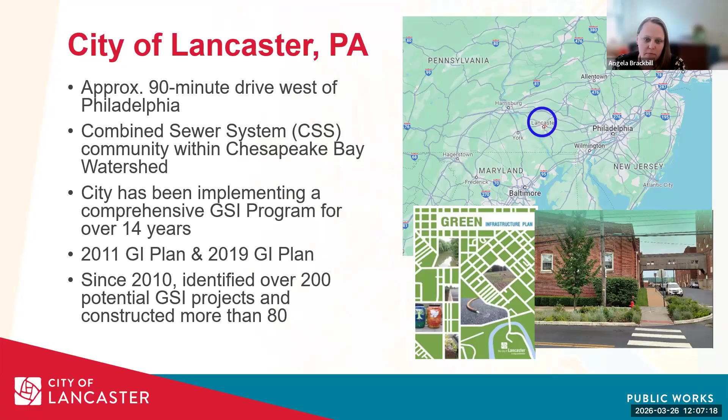Since its fruition, about 2010, we have identified over 200 potential green infrastructure projects in the city, both public and private, and constructed more than 80 of those projects on private and public property throughout the city. Just a little background on this project. So Longs Park is located in the northwest corner of the city of Lancaster, Pennsylvania. It is in those annexed MS4 areas of the city.

The entirety of the park is tributary to the Little Conestoga Creek. The Little Conestoga Creek is tributary to the Conestoga River, which is ultimately tributary to the Chesapeake Bay. This Little Conestoga Creek is listed as impaired for pathogens, but Longs Park itself is one of our most popular parks in the city. It's over 80 acres, and it is owned, operated and maintained by the City of Lancaster. This park hosts a ton of activities every year, especially in the warmer months, including art, music, and food festivals, and many other events.

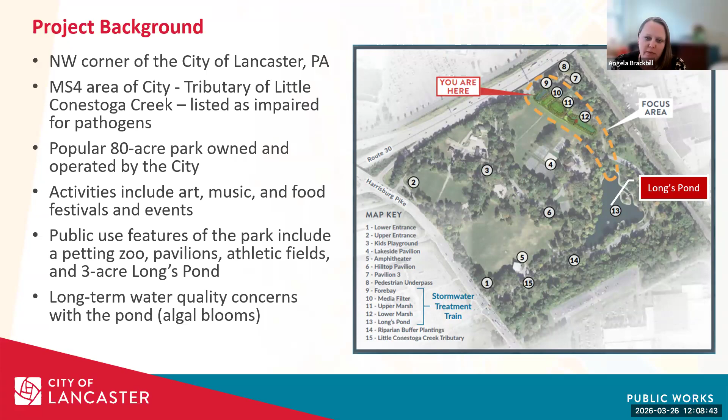Public use features of the park include a petting zoo, pavilions, many athletic fields, and kind of the crown jewel of the park is a 3-acre Longs Pond, which can be seen here on your screen. Longs Pond has long suffered long-term water quality issues. With the pond, it's more algae and algae blooms that we've had issues with. So part of the implementation of this project did deal with the pond here, and I'll get to that in just a second.

So as I mentioned, the main goal of this project was to improve that pond, improve the water quality, and reduce the algae in that pond by not only treating the nutrients, but also increasing the flushing to the pond itself. With that, and our MS4 permit, we were also required to meet or exceed regulatory requirements of the city's Chesapeake Bay Pollutant Reduction Plan. So this was a plan that we had to meet. We reference it as the CBPRP.

And that plan did require, in the Little Conestoga Creek watershed area, that we install means to achieve about a 10% reduction in total suspended solids in that watershed. Other goals of this project, being a municipality, was leveraging multiple funding sources such as grants, which I will dive into in a bit. And then, of course, designing with maintenance in mind. As I mentioned earlier, we own, operate, and maintain this park, so maintenance was a very big and key piece of this project.

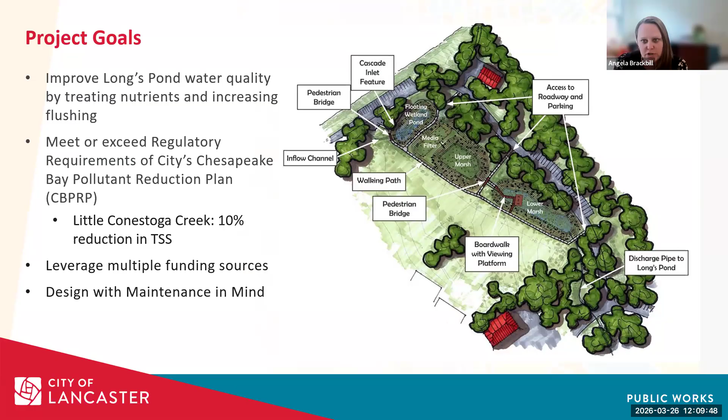Many considerations went into this project. First and foremost, being such a popular park, we had to make sure that it was a public amenity to the park and that it was complementary to Longs Park's aesthetic, its use, and also its users' experience. Other considerations was park space. It's a very popular park. It's very heavily used. So we had to be mindful of the footprint of this facility. We couldn't take up too much space in the park for this facility.

Long's Park is also known for its big, large canopy trees, large oaks in particular. So by installing this facility, we had to make sure that we were protecting those existing trees and that existing canopy versus installing stormwater and removing such.

As I mentioned earlier, part of the treatment of the system to the pond itself was increased water to the system. So we had to make sure that it performed during large storm events. Long's Park doesn't flood now, so by introducing additional flows to the pond, we didn't want to create a flooding situation that doesn't exist now. And then again, of course, design considerations back to that maintenance and cost.

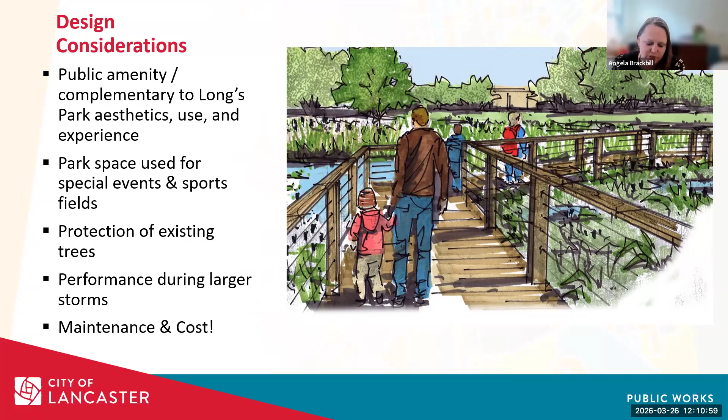So Long's Park wetlands are constructed wetlands and they're considered a treatment system or a natural treatment system, which is essentially an engineered ecosystem that uses natural, biological, physical, and chemical processes to improve water quality. In other words, solids are removed through settling, phosphorus is removed through biological uptake and settling, and then nitrate is removed through denitrification.

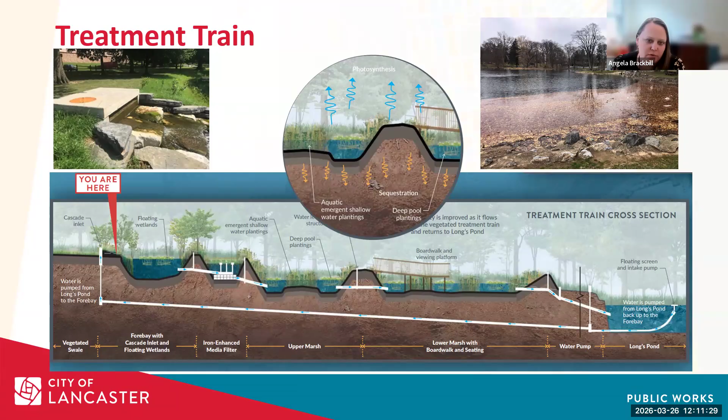I can use my laser here, see if I can figure this out. Hopefully you can see that. So just as a briefer for this project, you'll be able to see Long's Pond here on the right side of your screen. Essentially water is pumped from Long's Pond through conveyance to the system. The water enters the system through what we call an inflow or a cascade structure.

It then enters about a 0.1 acre forebay that includes floating wetland islands, an iron enhanced media filter, which is about 0.1 acres, an upper marsh, and then a lower marsh, which are both about 0.2 acres. And then that treated water is conveyed back down into Long's Pond. So it's really pumped up through the natural treatment system and treated, and then that clean water heads back down to the pond.

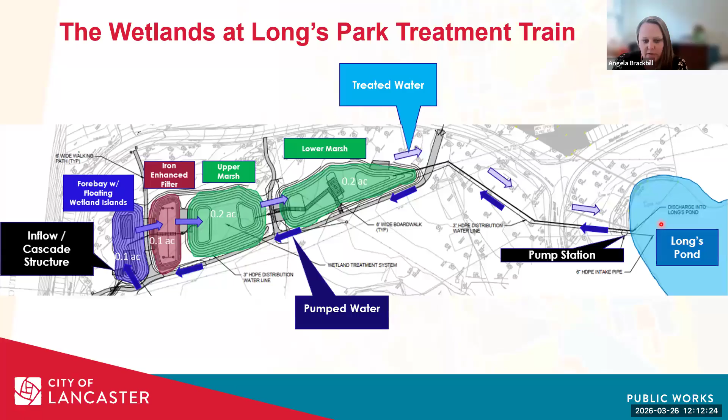So drainage areas were pretty key, obviously, with this design. It really does have two inflow sources, right? I alluded to a pump station previously. So stormwater runoff is received from Route 30, but then water is also pumped from Long's Pond.

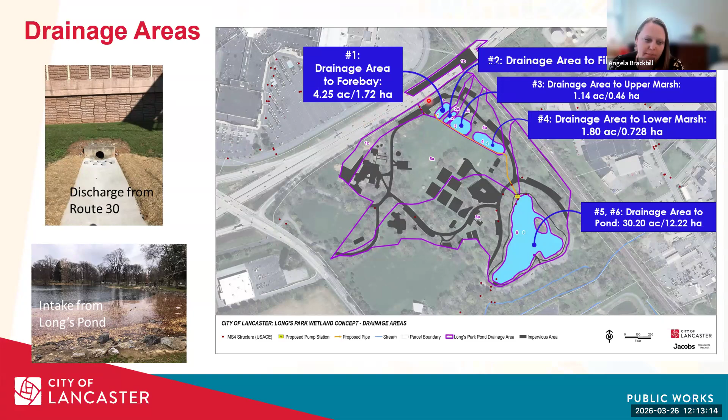So to dive into the pieces a little bit, the first system that the water enters is that 0.1 acre forebay with floating wetland islands. This receives that pond water via that cascade inlet structure that I mentioned, and also that runoff water from State Route 30 via an outfall that flows through a vegetated swale into the forebay. This forebay acts as a water filter to let everything filter and settle out. That's the first line of defense for the treatment system.

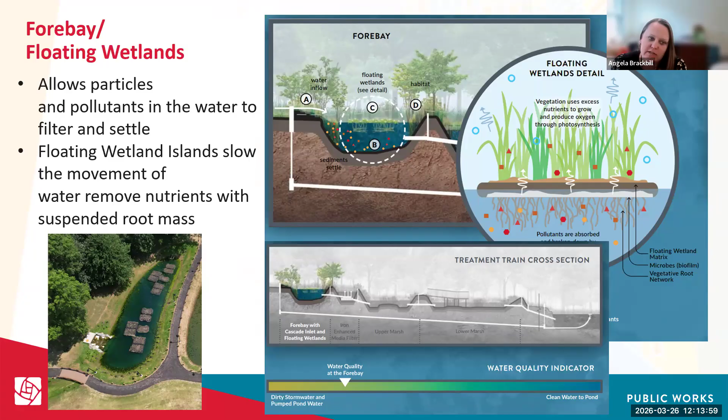Floating wetland islands were also installed, and they help slow the movement of the water and also remove nutrients via that suspended root mass. Water then overflows from that forebay into an iron enhanced media filter. This filter is really for promoting phosphorus removal through iron oxidation.

So it receives that overflow from the forebay, and then iron filings in that media rust, right? And that forms iron oxides that bind phosphate. So it traps that phosphate in the media filter itself. The system obviously also helps reduce nitrogen, sediment, and metals.

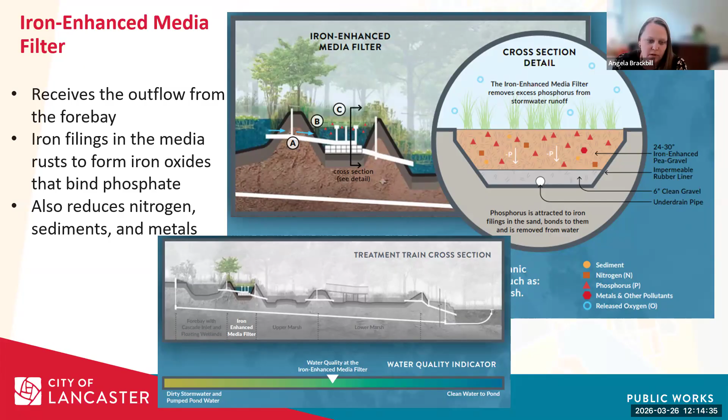This system is a bit more complicated, so I thought I'd touch a little bit on the filter operation. Essentially, water enters the media filter and then vertically flows through the bed, which consists of iron filings, about 3% by weight, and gravel. So it's a mix of filings and gravel, and that promotes that phosphate removal.

We did notice early on in design that, for this system to work properly and not become anaerobic, it really needed to be cycled through. So we did install an actuated valve cycle, which is closed for 48 hours and opens for 3 hours, which essentially lets this system drain down completely every 2 or 3 days.

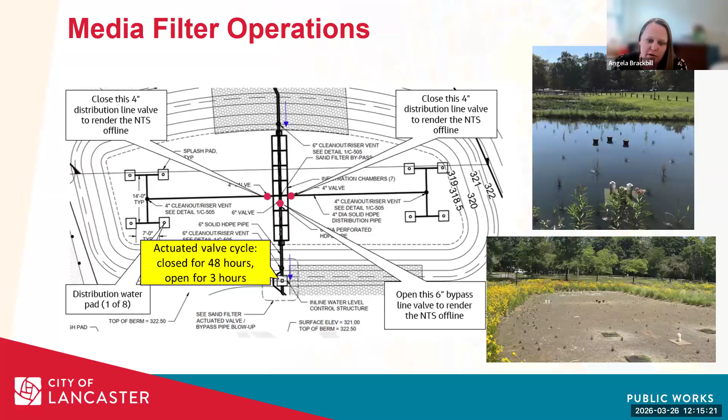Water then flows into the upper and the lower marsh areas of the wetland. It receives that outflow from the media filter, and it provides further removal of sediments and nutrients, but it also helps to reduce any residual iron from that media filter that makes its way into the lower portion of the wetlands.

This upper and lower marsh includes both deep and shallow zones, and that helps with enhanced solids retention, denitrification, phosphorus uptake, of course, and also provides a lot of ecological habitat, as well as natural mosquito control.

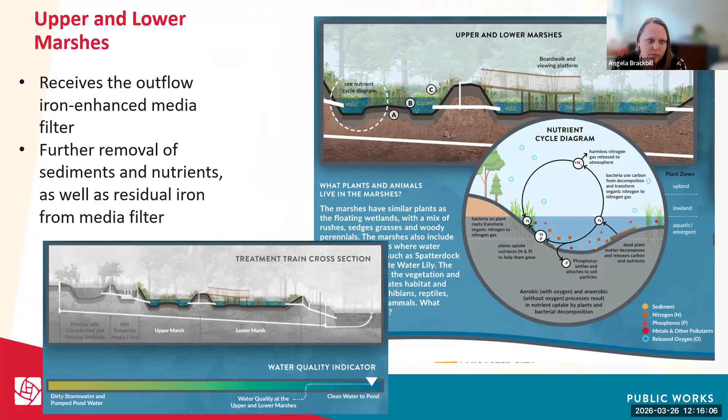Obviously, being a wetland, this entailed quite a bit of planting. So this plan had a massive planting plan. Approximately 10,000 plugs were planted in this system, about 250 to 300 shrubs, and a little over 300 aquatic deep pool plantings. I did kind of break down the planting plan on the left of your screen.

So it did include the installation of trees and, like I mentioned, shrubs as well. But we did use a seed mix in the upland areas and a seed mix mixed with plugs in those wetland areas, like the side slopes to the basins, if you'd call them that. The emergent marsh water zones, so those deep and shallow zones, were all plugs, as well as the sand filter and the floating wetland islands.

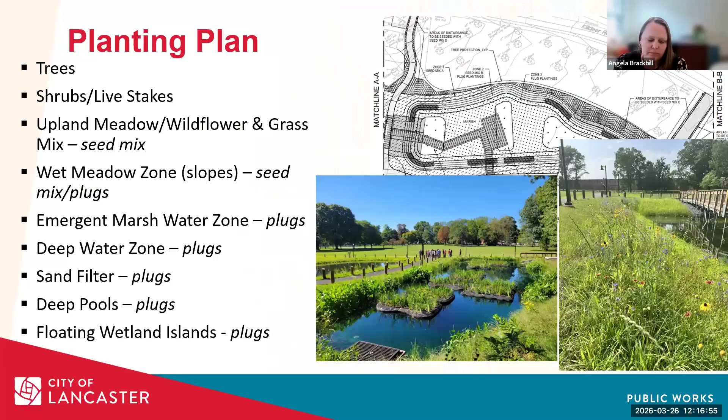So what does the system do, right? We originally modeled this system for an analysis and for benefits, and it was designed to provide detention up to the 100-year, 24-hour storm. But really, the water quality that we showed through our modeling provided a reduction of about 20 pounds of total phosphorus, 100 pounds of total nitrogen, and about 12,000 pounds of total suspended solids per year.

Those numbers there exceeded by far our Chesapeake Bay pollutant reduction plan requirements. And ultimately for TP, it was about a 50% reduction, TN a 32% reduction, and a huge reduction of about 95% for TSS for this small watershed.

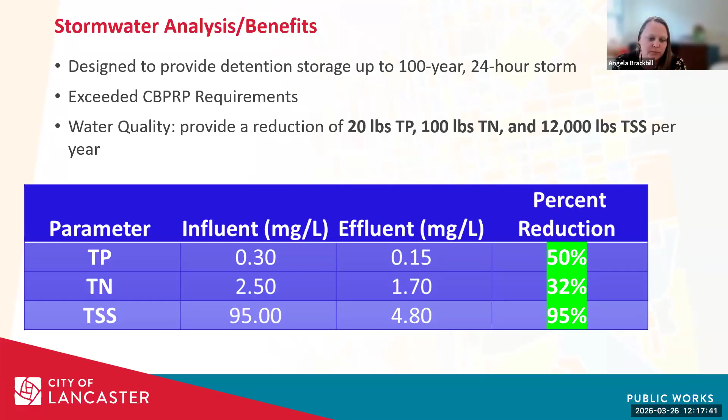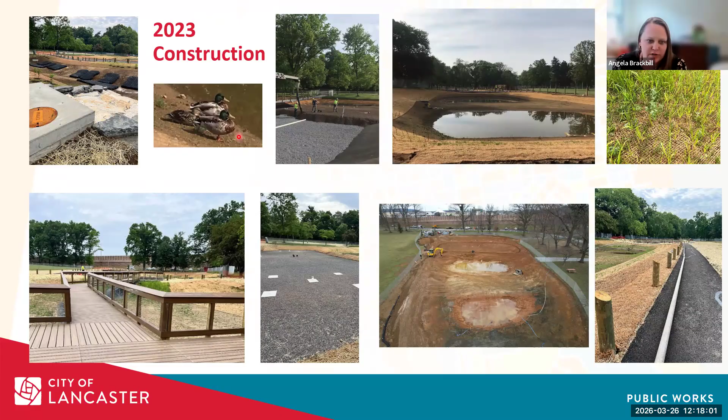Construction started in 2023 and took about 6 months to complete. So construction was also finished in 2023, and I added some photos during construction here, and of course some of our guest visitors during this construction. And then, as I mentioned, it was completed in 2023.

So everyone always asks, what about cost? The estimated construction cost for this project was about 1.95 million, and that was after value engineering based on preliminary design. The original design came in at about 3 million, but we took that value engineering and really got it down a bit. That did require the elimination of a second pump station and a second boardwalk over the upper marsh and some reduced grading and whatnot,

but it really brought it back down to a more feasible cost for the city. Ironically, actual construction costs came in a bit lower than what we had planned on, about 1.8 million. And of that 1.8 million, we did receive about 515,000 in grants. The PADEP's Growing Greener program, the Lancaster Clean Water Partners, PA Fish and Boat Commission, and the Susquehanna River Basin Commission definitely provided some funding for this project and a lot of assistance that was needed.

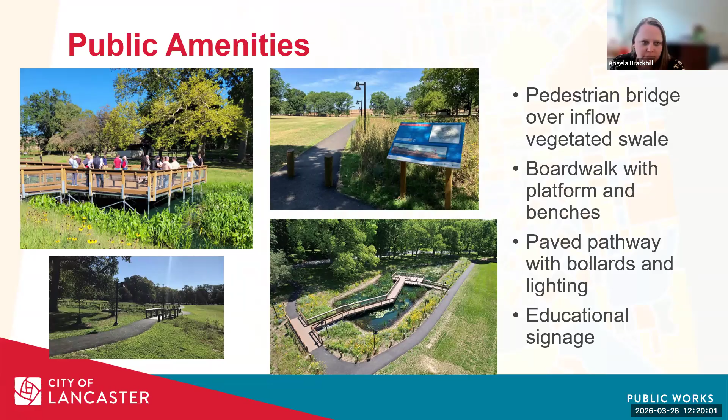So the educational signage was also grant funded, and we developed it in collaboration with both our Public Works Department and the Department of Neighborhood Engagement. We really intended this signage to engage technical and non-technical audiences. So that meant we had to focus on accessibility and the use of plain language, right? Anyone at an 8th grade level or older should be able to easily understand and read this information.

And then we also worked very diligently with our Department of Neighborhood Engagement to ensure that we had translations in Spanish, Swahili, French, as well as ASL. So I'll go ahead and see if I can click on this link here, if it'll let me. Not letting me, there we go.

So as you can see here, we do have this up on our city website, and it is shown in English, but it's easily accessible. You can click on different languages and it will show you all of the information in different languages. And then the coolest part, I think, it was the first time the city ever worked with an interpreter for American Sign Language, and I think it turned out fantastic. So I'm going to take a minute to share this with you. We did do a video on Longs Park, which I can share now.

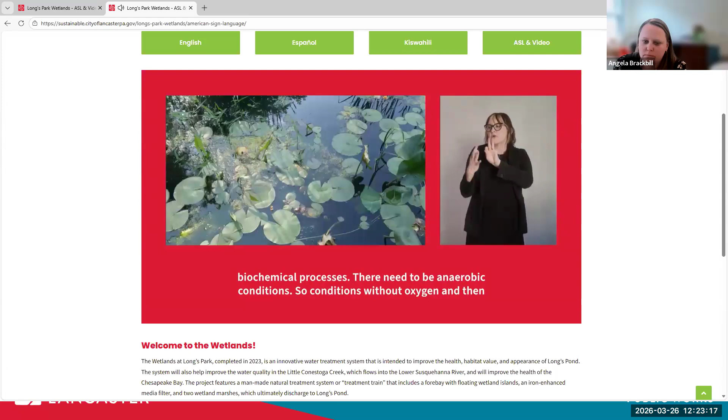Once water flows through this and filters through this, it goes into a series of 2 kind of traditional wetland marshes. And then at the end of that, there's a pipe that will discharge the water back into Long's Pond. So it's a whole treatment train. That's really important for that nutrient removal through biochemical processes. There needs to be anaerobic conditions, so conditions without oxygen, and then aerobic conditions with oxygen for these microorganisms to do the nutrient removal that's necessary.

We're hoping to lessen the manufactured treatments by these more natural treatments. We're seeing a lot of habitat that's been created, a lot of biodiversity, a lot of really high functioning stormwater practices that are occurring here. When we are paving over this, when we are compacting it with lawnmowers, when we are tilling it, all of these activities just accelerate the rate in which that stormwater runoff reaches our streams.

If it were to rain in this beautiful Longs Park today, a lot of that will saturate into the ground, and it might take months or even years to reach the Little Conestoga and the Conestoga River. That is how our streams stay healthy today. One of the ways in which I think that Lancaster and many other cities and municipalities are working to better serve our communities is by cleaning the water and working with a variety of different stakeholders to do that.

Oops, sorry. So yes, that educational signage, I'm proud of that, and that turned out fantastic in my opinion. So to keep moving forward, as I alluded to earlier, a big part of this project was the operation and maintenance. We had to keep operation and maintenance in mind. Like I said, it's a city operated and maintained park, so we had to acknowledge that early on in the

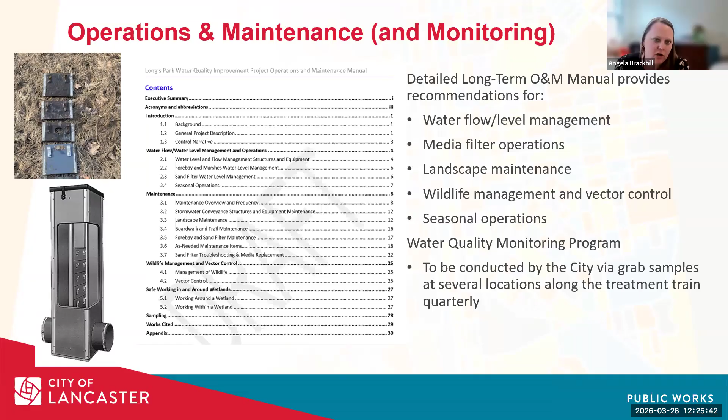So we did recently contract with a company that will conduct, via grab samples at several locations along the treatment train, quarterly sampling events. So lucky enough for this presentation, we did receive our results from our first sample, which occurred back in January of this year. I have on my screen here the details of that, but it was very cold. The water was only 37 degrees Fahrenheit. I'm not a water quality expert, but from what I've been told, as the water gets warmer, we will get even more data from this.

But from this sampling event, we did see about an 80% reduction in total nitrogen. On the top right of your screen here, you can see the influent water, which is entering the system at that cascade structure, and then the nitrogen levels decrease as the water makes its way through the treatment system. Ironically, total phosphorus was a non-detect across the system, including the influent and effluent, or discharge. We even did go back and test the phosphorus again with low level detection limits, and it was still non-detect.

Ironically, the filter discharge was actually a little higher temperature than what we saw throughout the rest of the system. And we're thinking that maybe due to the media mixing and buffering, up and down in that system from day to day. So we're expecting some temperature swings there, but we're thinking that may be favorable to denitrification to a slight degree, but more to come on that as we keep moving ahead with water quality sampling.

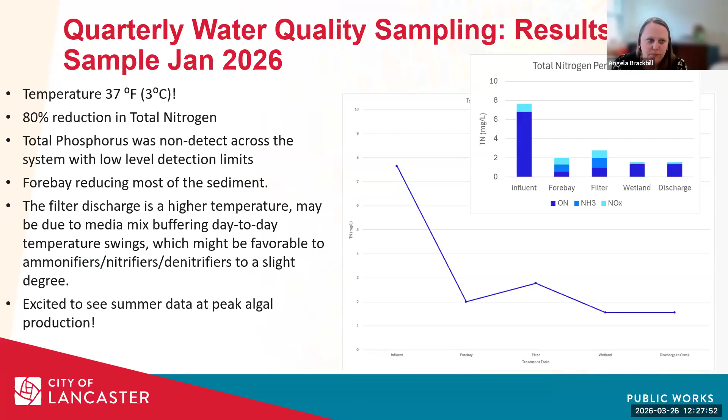I just wanted to touch quickly on project insights and some lessons learned. There were quite a bit of them with this project. It was a very successful project, but like any other project across the city, and I'm sure elsewhere across the region, there's always lessons to be learned from every project. So in terms of site and logistics, it was a pretty heavy lift in that area. With all the scheduled park events, and all the activities that happen throughout the park, we did really have to coordinate and schedule accordingly depending on those events, which was the lift, but we got through it.

And then again, back to those memorial trees and mature trees on site. As you can see up here, we really wanted to make sure we protected them during construction, didn't need to remove trees to install stormwater management. You can kind of see in this general area, we did a pretty good job with that. I believe only 2 trees were removed with this project and they were replaced in double.

Other issues that kind of came up in lessons learned was material submittals. So originally our iron enhanced media filter specified that we were supposed to have an iron enhanced sand filter. But working with our contractor and many distributors across the region, we couldn't get our hands on that correct weight or percentage of iron filings with the sand. So we ended up going with an iron enhanced gravel filter, which I think has turned out to be just as successful. But again, more to come on that once we get our water quality for phosphorus.

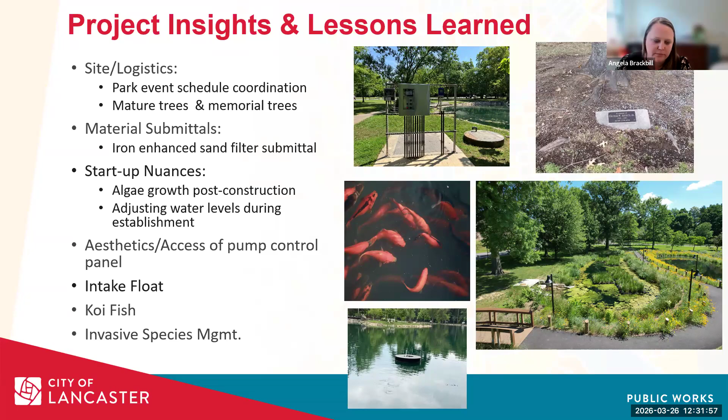Finally, I just wanted to show some images of the wildlife we've seen at the wetlands. We've seen an explosion of wildlife, anything from many, many monarch butterflies to dragonflies to those eastern turtles, ducks. First time I've ever seen a blue heron in my life was out in this area. So ecologically, I think the wetland is doing a fantastic job as well.

One of the questions that does come up a lot is about mosquitoes. Like, do we get complaints about mosquitoes? And I think partially that reason is because there's just simply so many dragonflies. There's so many flowers and so many dragonflies that we haven't had an issue with mosquito populations yet. So all in all, ecologically, this project, in my opinion, was a huge success.

I think that's all I have today. I just wanted to show off some of our achievements here. Longs Park did make it into the WE&T Magazine. Obviously, as Michelle alluded to earlier, we are a 2025 BUBBAs Grand Prize winner. We also received the Diamond Award for Water Resources and the Governor's Award for Environmental Excellence in 2025. So this project has been huge in success, and I think it's a fantastic project to show off. So thank you very much.